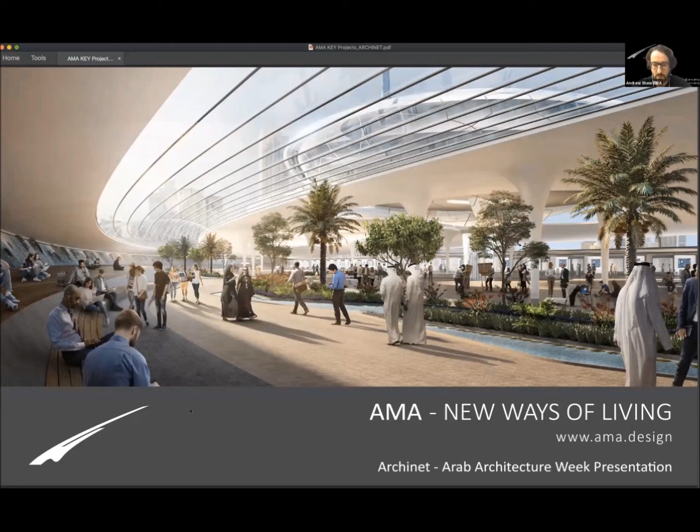So I'll tell you a little bit about AMA first of all. We're a boutique design company, headquartered in Dubai, started about 5 years ago. It's a partnership with myself and Mr. Naji Mahmoud, who's from Jordan originally, and went through AUS here in Dubai. We like to be very design focused. We've both worked for international practice before, and we met working together in an international practice in Dubai, and we worked in some competitions and projects together, found we worked well together, and now we're working as a company together.

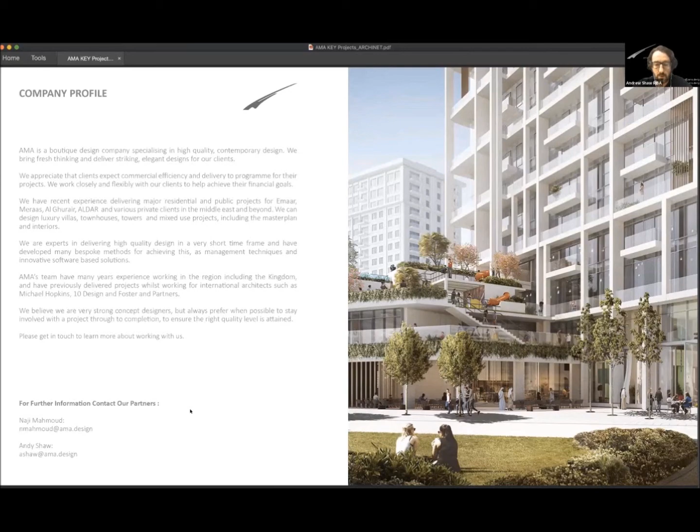So we're quite a young design studio focusing on contemporary design, and we've done a lot of residential work with Emaar the last few years and other big clients in the UAE.

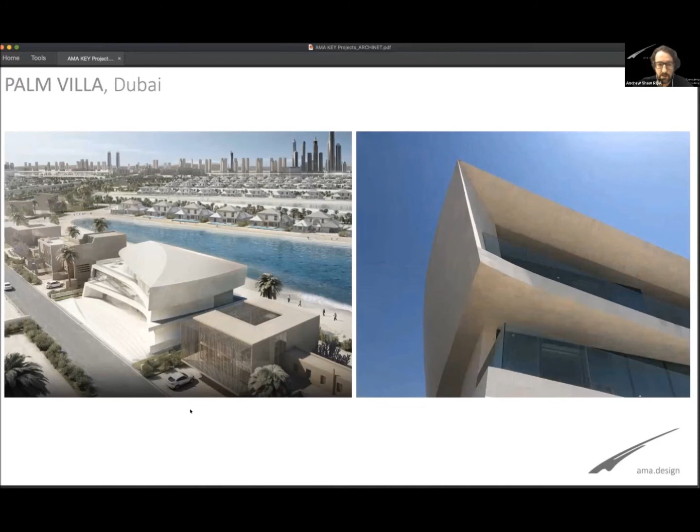As I mentioned, some of our first projects are now being built and just about finished by the end of this year. This is a villa on the Palm for an individual private client who really wanted something unique to him, innovative and distinctive. So we worked a curvilinear geometry to make the most of the views while giving good shading from the sun, on this quite special site on one of the palm fronds in Dubai. That project is pretty much finished.

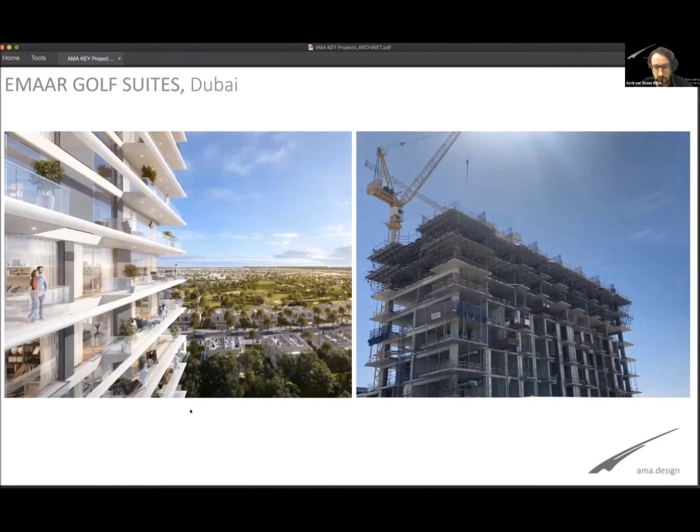Another one of our early projects for Emaar is this residential towers in the Dubai Hills Estate, looking over the golf course with nice big balconies, capturing these views. So these are all on site. It's very great and exciting for us.

Now, I'm going to pass over to my colleague Ahmed now. We're going to talk about residential design today and what's going on in this kind of pandemic situation, unprecedented, and how that's going to change long-term approach to cities and residential design. There's some other big pictures affecting residential design, and then we'll show some projects. So I think you're going to share screen now, Ahmed? Yes.

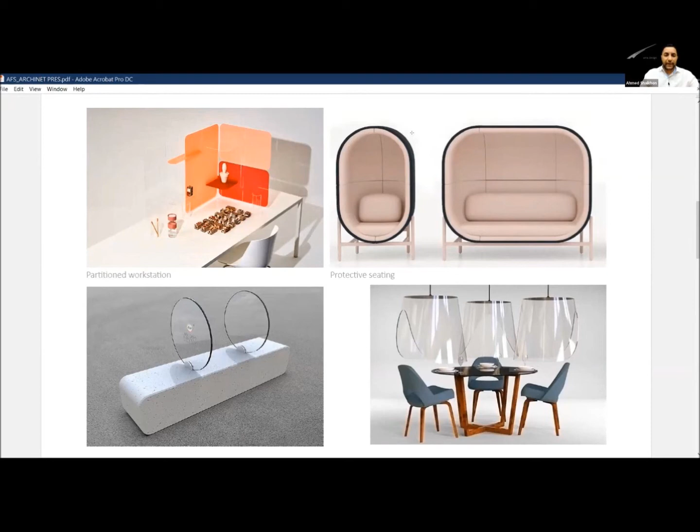These are other examples currently being used to mitigate the spread of COVID, using partitions in working spaces and protective seating. Protective strategies don't have to look unaesthetic. You can see things that, in my opinion, can look nice and be comfortable while providing the protection necessary to mitigate COVID-19 transmission.

Now this is an example that actually implements adaptive measures from the very beginning, as opposed to just superficially like the examples we've seen previously. This deals more with design from the start - how do you actually design, in this case, a pandemic-adapted apartment?

For example, something not commonly done is having a sanitization station near the entrance where people are forced to remove their shoes, with a hand wash/sanitization area, and on the right side people can remove their PPE equipment and place their jackets.

Then you have the delivery door, so you don't have to come into contact with anybody delivering anything to you, be it food or anything else. They can open the door from outside, place the items you've ordered, and you can safely take it from the inside after sanitizing.

Something else that could be done is introducing a shower in the guest bathroom, so guests who have been commuting can go in there and completely sanitize as much as possible. Then there's the way you think about spaces in terms of planning.

You can have open plans but with partitions that temporarily come in when someone is engaged in sanitization, as well as a multifunctional room/gym for working out, and buffer spaces between your main spaces.

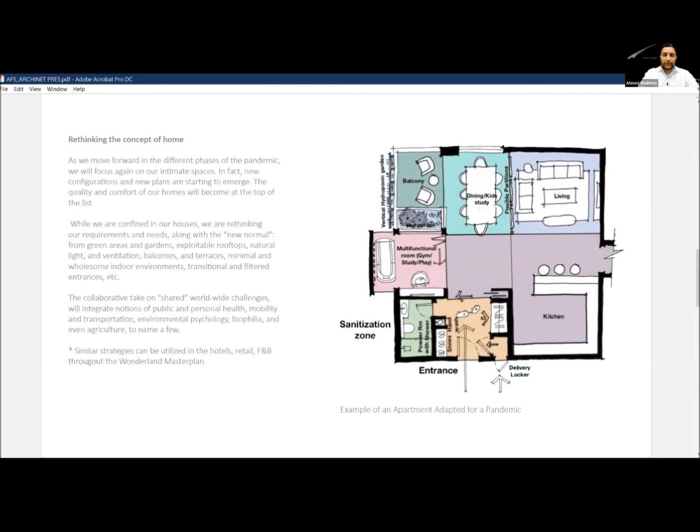If we talk about the public realm, this case study is about a restaurant and how they mitigate contagion using strategies such as limiting the movement of certain users, depending on their clearance and what they're doing. People in the back of house would not mix with people dining, mitigating contagion this way. This diagram shows the clearance of people's movement.

You also have to rethink how you design public spaces and restaurants - maybe using less or eliminating counter seating altogether, spreading out more and increasing the number of booths. This doesn't have to decrease the number of users by a lot.

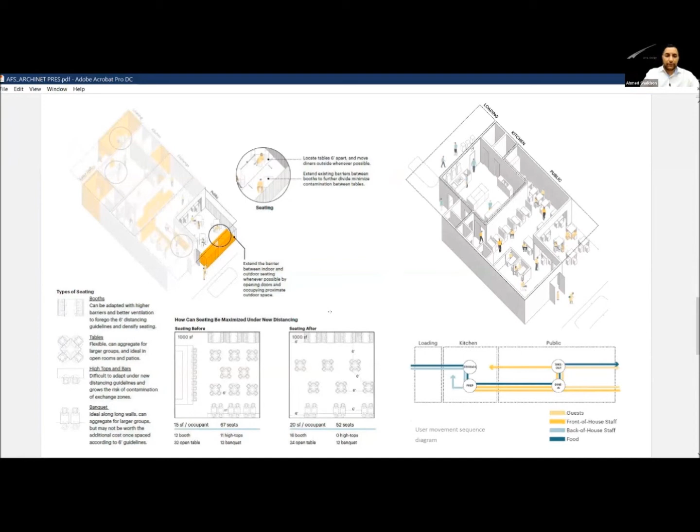So here, the occupants have not decreased by a lot, just by eliminating the elements that people are really close together with, and increasing the number of elements that promote isolation while still being in contact with people. As you can see, instead of 67 seatings, it reduced to 52, which is not that much less, but it ensures everyone's safety for sure and provides everyone with the experience they're after.

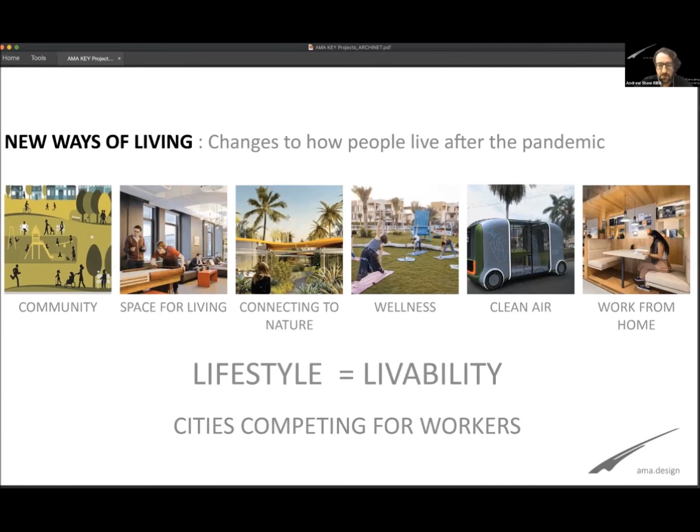This is going to, I think, change the approach to living design, because this kind of livability becomes much more important than location. The other major factor which had been affecting housing before the pandemic is the cost of living rising across the world, making it harder for families to live.

Construction hasn't really changed much in the last 50, 60 years, still just concrete and cladding. But there's new construction methods, whether it's prefab, MMC, 3D printing, which could completely disrupt the way construction is done. Some of the changes we've seen in other industries, such as media, could happen in construction and change the whole dynamic. What if your housing improved as much as TVs have in the last 20 years?

And there is a housing crisis in some form, I think, in every country. In some countries there's just not enough housing and it's too expensive. In some places it's just misallocation, or the old stock has to be replaced with climate-adapted ones that are not emitting so much energy and carbon.

Climate change is also getting more and more important, and there's a big picture to address. As we know, housing takes up so much energy to build and then use, so this has to be addressed as well in design. I'm going to just keep an eye on the time.

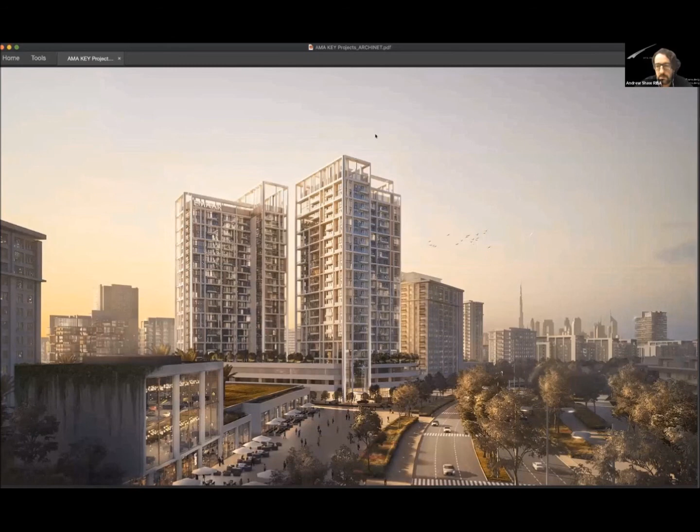I'm going to go through some of our projects which address these big issues. One of them is the idea of co-living, which is a new typology that didn't really exist 5-10 years ago. We designed for Emaar a co-living project in Dubai, which is very much about livability. I'm going to speed up a bit because we've got 7-8 minutes maybe, so I'll go quicker through the images and give a high-level summary.

So, co-living project, there's a lot more communal facilities than in a typical tower. This whole podium is connected to a garden. There's a big gym, spa, a common kitchen dining area. You can share spaces such as laundry and a working area, cinema, yoga room.

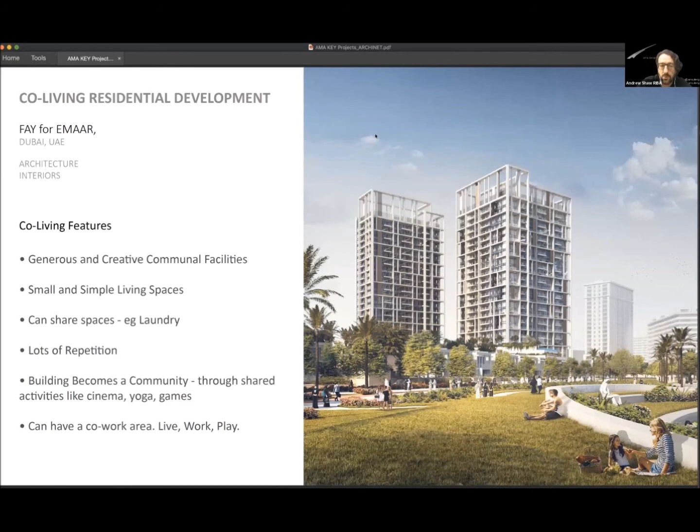But in exchange for that, you have a slightly smaller, simpler unit, which makes it much cheaper to afford, and you're encouraged to congregate in the communal areas. Once COVID has gone away, meeting is much more easier. So you have a generally cheaper building, making it more accessible and affordable, but with very generous shared communal facilities to create more of a community hub around your building.

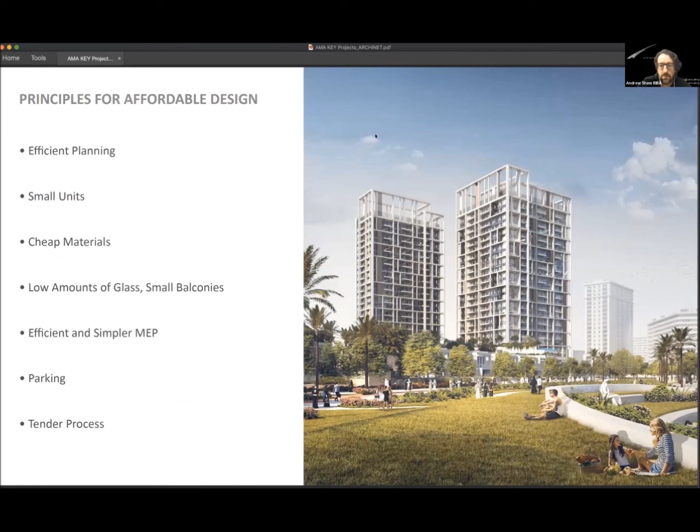This was in Dubai Hills, and there's commercial metrics driving these things as normal. So you have to be quite careful - a lot of these projects, the trick is to have a very efficient plan that really works to make the financial side work, but be creative with the facade and the massing to make it elegant and interesting, not look like a bad housing block associated with the decades before.

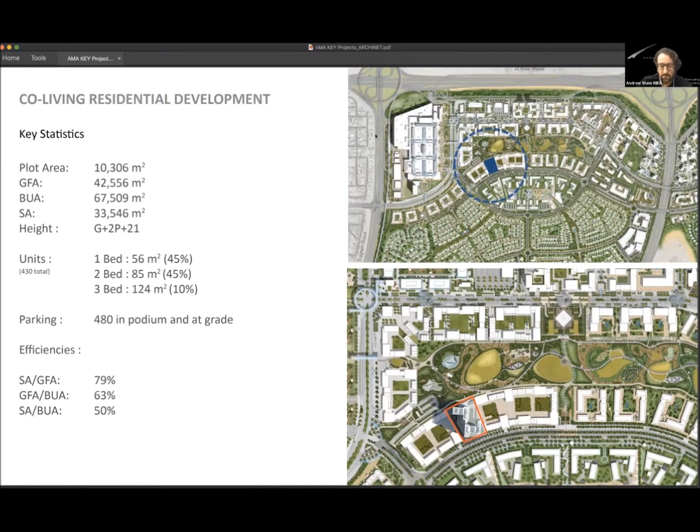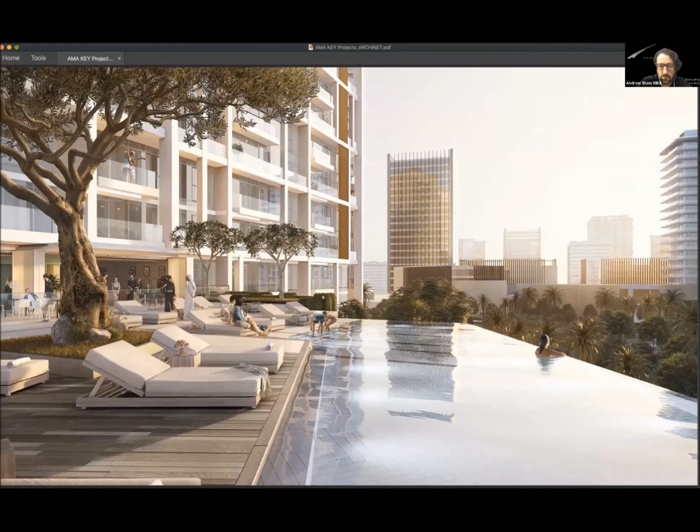So here's this co-living project, Fay, and you see the generous podium with lots of functions connecting to the park. There's the pool, and again generous balconies to give that kind of outdoor fresh air living.

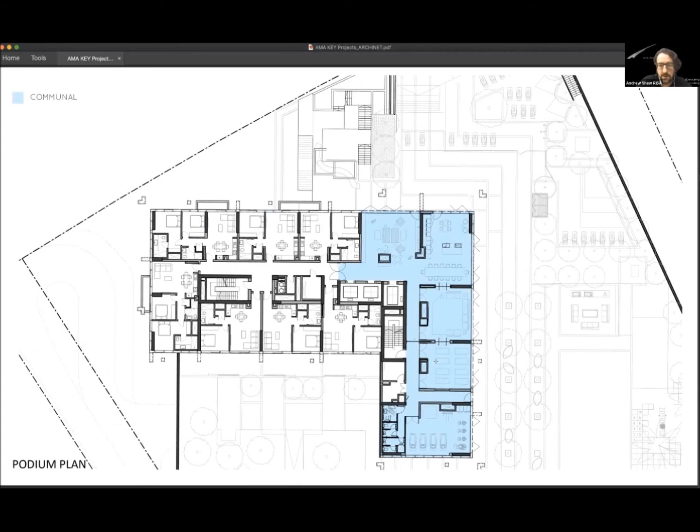This is the podium communal area, again a lot more than normal, with a yoga room, communal dining, kitchen. The plans show that for efficiency, it's all mirrored and modular in the units. There's only really 5 types across the whole building, so you can design them carefully and then repeat, which speeds things up.

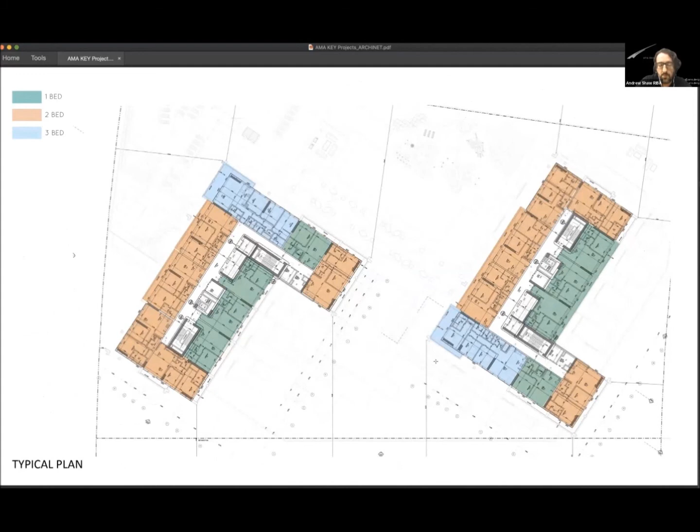We super fast-tracked this project. We did a design to tender with full approvals in only about 4 or 5 months in Dubai, which is very, very quick, because with the client we made lots of fast-track processes. You still get a nice unit - these are some plans, a typical unit that went in the sales brochure. And this has started on site as well.

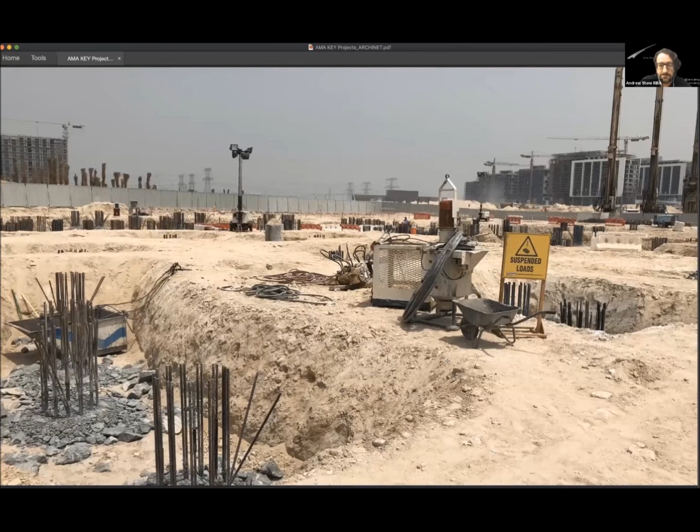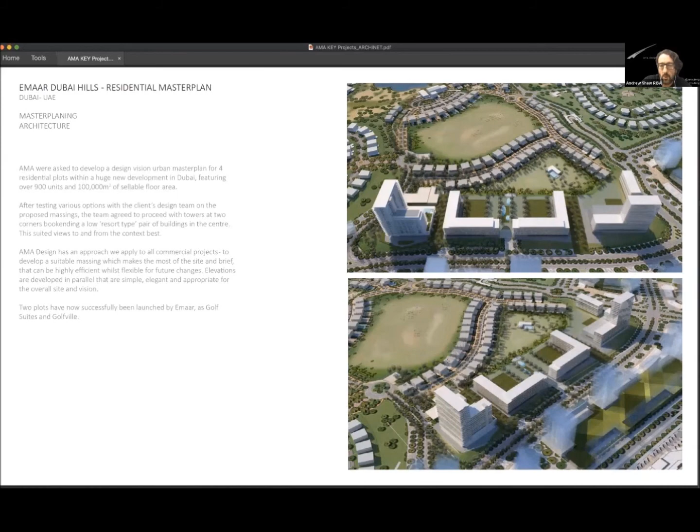Nearby, we did a master plan with Emaar and some of these projects. Here we're looking at the massing, keeping it simple, with the same principles of making units affordable whilst getting the best space, quality, and views of nature by creating parks, removing car parking as a big feature of the podium, and opening up the views to the golf course and the park in front.

This project is kind of mid-rise, low budget, but it's trying to get the best quality out of something simple and effective, making the most of the park that integrates with the building.

This is another one from the same plot. The difference from earlier versions of commercial development here is trying to get a lot more community out of nature and connecting to natural features, whilst making something affordable because of a very competitive market in Dubai at the time these were launched, to make it very affordable but get the best value and quality out of it.

This is another co-living project, but even tighter sizes, because the last one was actually quite generous in size.

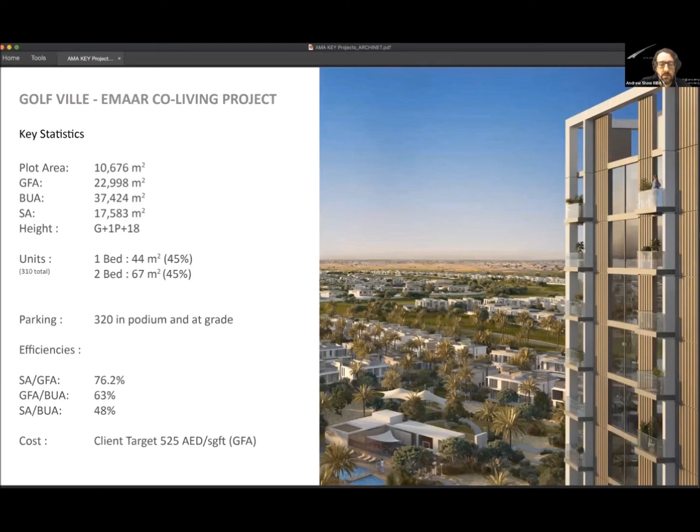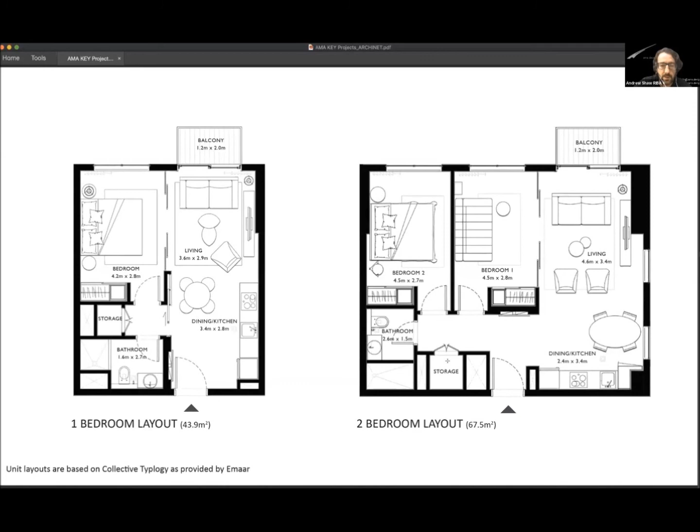Two bed as well, kind of more flexible, with a wall for the first bedroom. It's quite a tight plan for Middle East standards in new development, but still enough to function, making it more affordable, and it's a very popular product of Emaar.

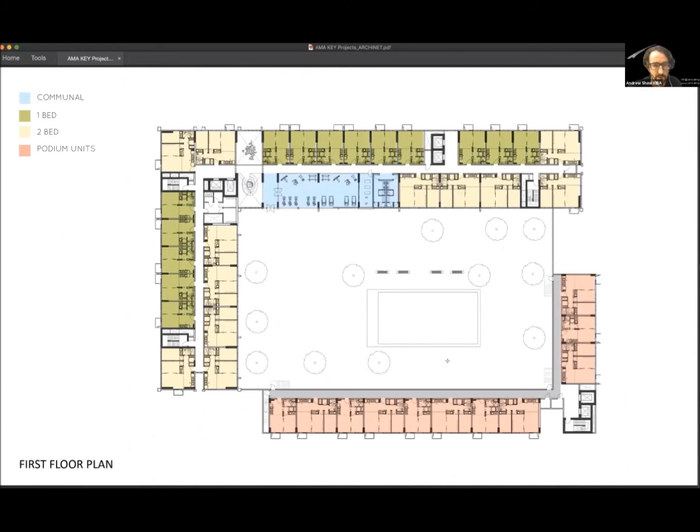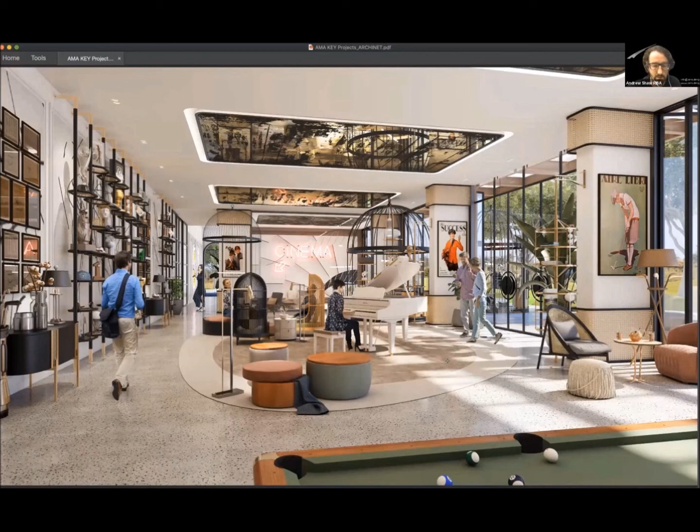This is the lobby area, again very active and communal. You can work here, sit and read, meet people, and there'd be an app to connect people within the building as a whole community of activities.

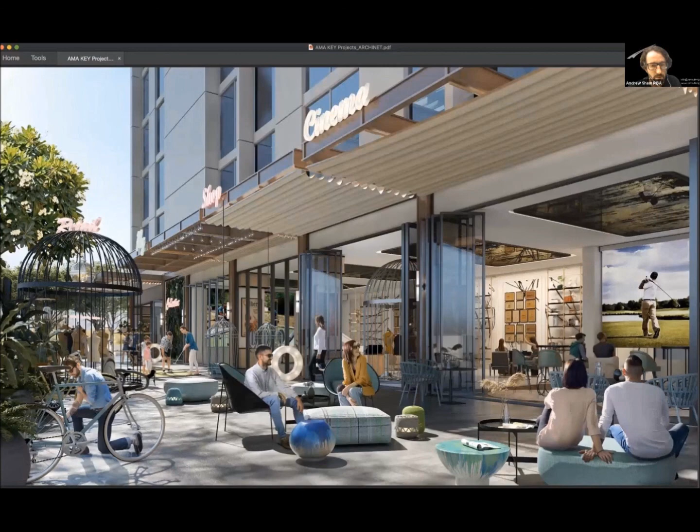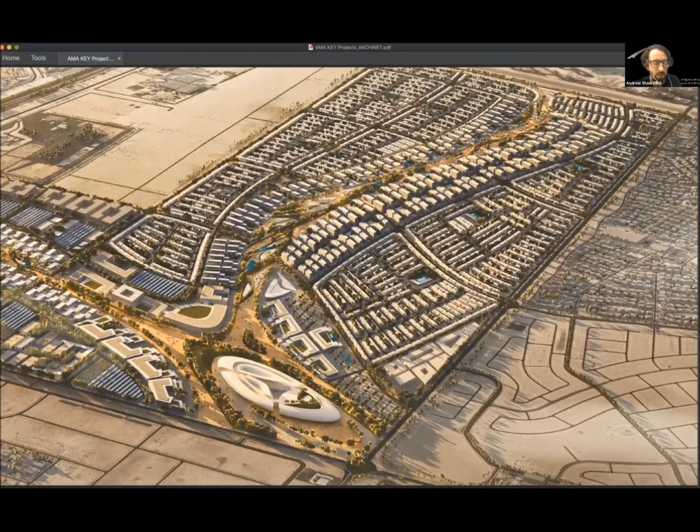This is another project we did earlier this year, a bigger scale master plan. What's driving this is a central spine, which is all this central block for no cars—electric vehicles only—to keep the air clean and encourage sustainability. You would connect from all these residential blocks to offices and other communal hubs only through electric buses running up and down, cycling, scooters, that kind of thing.

And our buildings use connectivity at ground level to encourage walking as well.

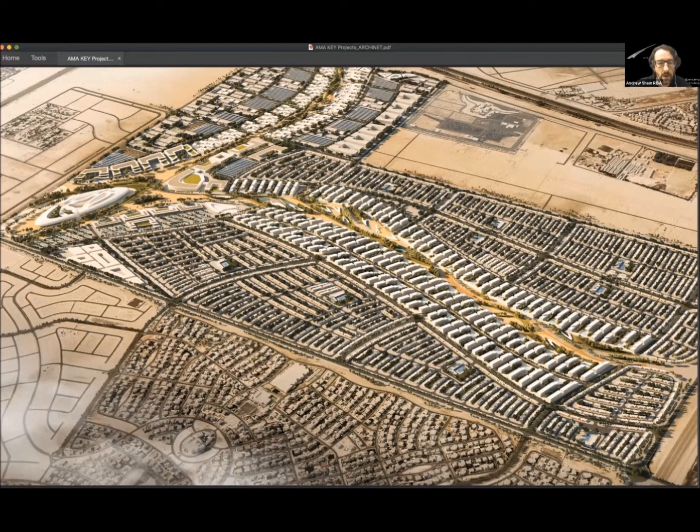So you see here again, this is the spine, and the connecting nodes and hubs. The whole thing is connected more with natural active elements, encouraging community and connection, and also non-petrol transport. You get this heart in the middle with activities, a green spine, and clean transport across, and within this there's living, hospitals, schools, everything, so you wouldn't have to really leave this community - it's like operating as a cell. Even the parking is at grade but covered with solar panels, to stop the car and the parking interrupting the street at the urban scale.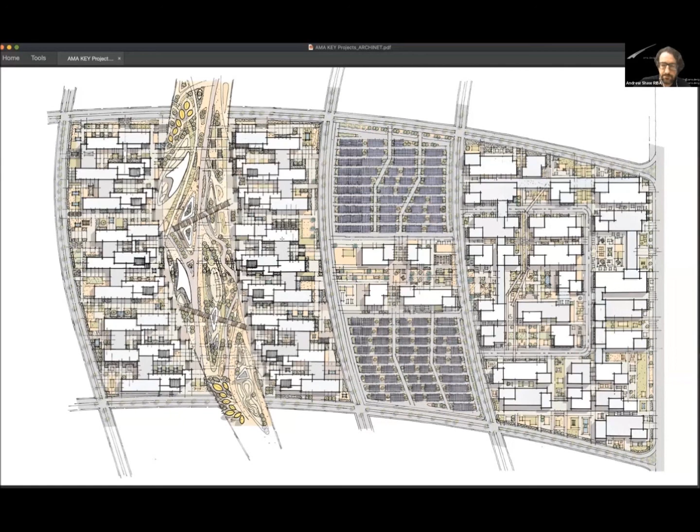And then you have your buildings connected by this green spine, and these are the link buildings we made to encourage walking so you don't have to be popping in and out - you can have a sort of AC route through most of the development.

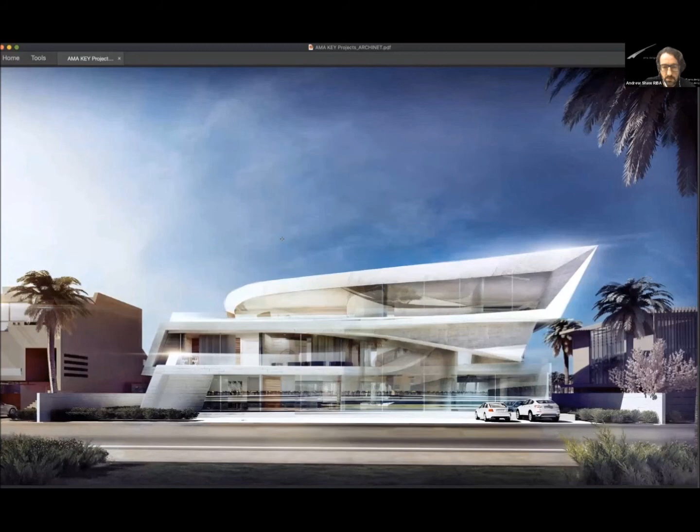Okay, so this is the villa on the Palm, kind of striking and innovative in its form. And this is some more pictures of it on site. This is the interiors following the same language.

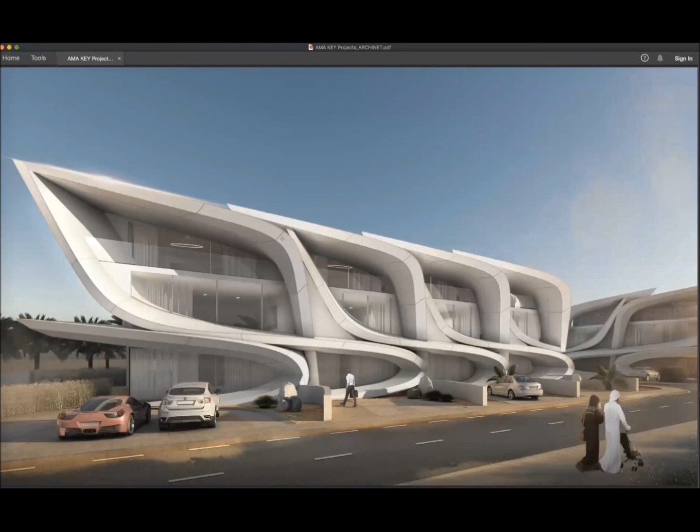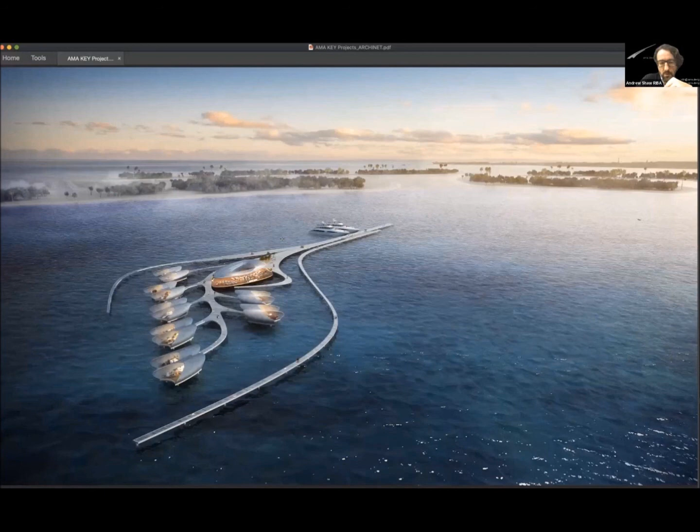Okay, we're kind of finished, I'll flick through the last few projects. These are different, but we're interested in how you can merge new technologies with mass production to try and get the cost down, but have something modern and striking. This is probably the most creative version, but this was for Sharjah - townhouses where the facade out of composites would be made off-site and mass produced and assembled to make something different and striking. This is a different way of living on the water with a circular economy to keep things within it.

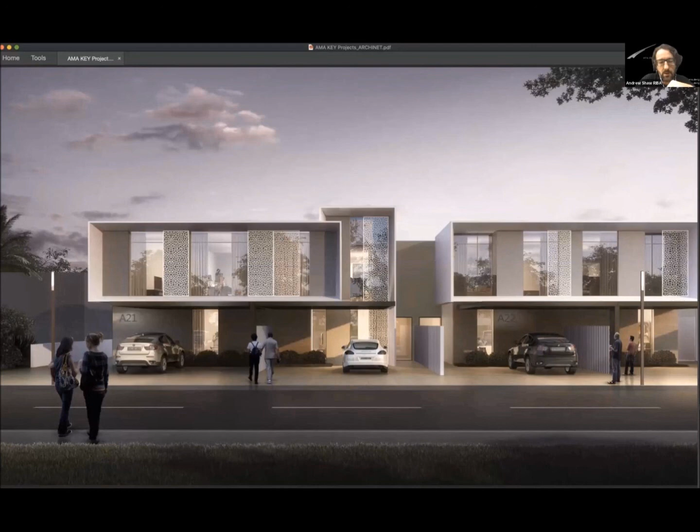I'll just skip over this. We've actually done a lot of residential work with Emaar and other clients here, looking at quite simple standard plans that work for residential, but by controlling the facade again, making a variety of materials, you can bring in some nice touches to make something that's affordable but high quality.

And we've done this with kind of villa blocks - this is for Egypt actually - again just playing with typology in this mid-rise. There's a trick of variety through playing with the facade module, but the underlying planning and massing module is very repetitive, so that you can quickly, cheaply design, assemble, and build and deliver this type of project in countries where housing is needed.

Because I think actually everybody, if they're offered a better house, would take it. So I think in some ways every country needs housing - some more than others though. Some are on a big housing drive, trying to make housing which is high quality for quality of life, and also now thinking sustainable, low energy, good access to nature, because it does affect everybody's well-being. I think I'll stop there.

I could have shown a bit more of co-living from around the world, but people can research that themselves if they're interested, because in other countries co-living is a bit different - it can be a refurb, much smaller scale. In the Middle East with this space, we've approached it as a kind of blank canvas to make efficient, tight, small units, but very high quality of life.

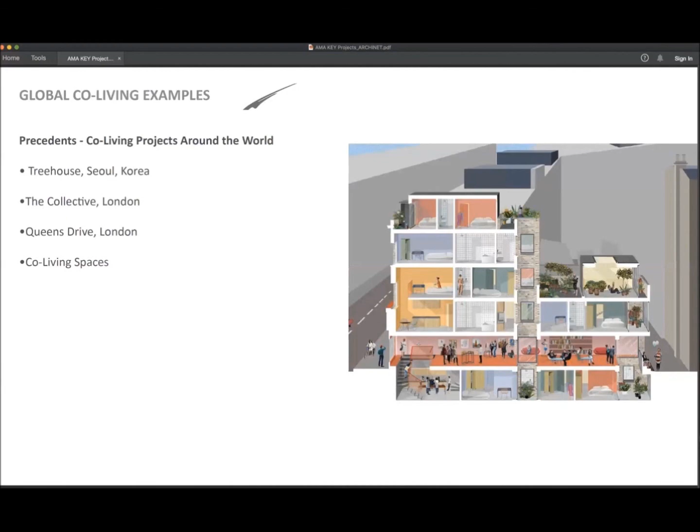Again, thank you for the presentation. We saw quite different typologies and prototypes of projects and methodologies.

Yes, we covered quite a lot there, but it's a big and interesting topic, and it's fascinating how much it's changing - this year has accelerated a lot of changes. I think we'll see a lot more in the next 10 years, and it's interesting that Saudi is very ambitious in how they approach these kinds of things. They're really keen, from what I see, to try new technologies and new things to address the problems that need to be addressed.